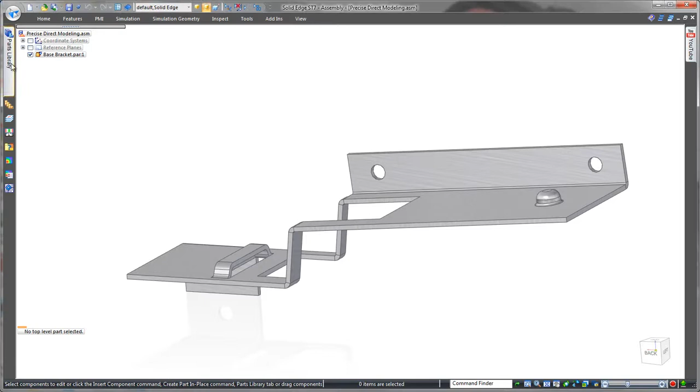Let's take a look at the precise parametric control on offer while we progress our spring clip concept. First, let's bring in our spring clip and assemble it with the parts it was intended for. Clip to the base,

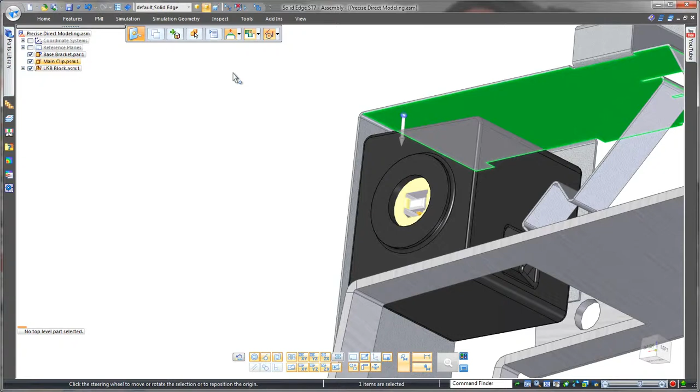and the USB block it needs to hold. The first precise change we need to make is to close up this gap between the top of the USB block and the spring clip. In most any other CAD system, you'd have to make this change at the 2D sketch level with sketch relations. In Solid Edge, we can simply relate faces in 3D instead.

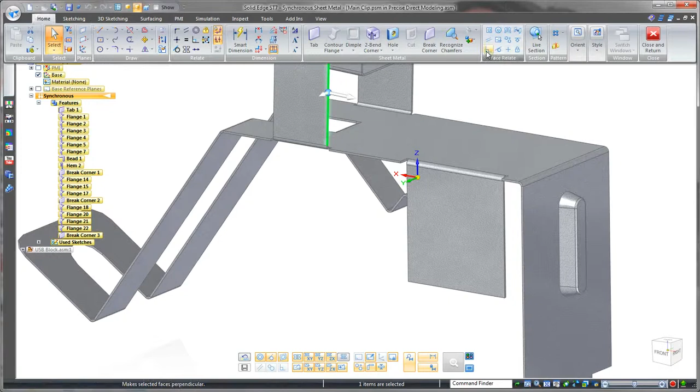Easy. Looking at the back, I noticed the tabs on the top are not quite square with the top face. No problem, a couple more 3D relations will fix this. For the side faces of the tabs, making them perpendicular to the top. And for the top faces, making them perpendicular to the side. Notice how both tabs are being updated here. That's the intelligence of synchronous technology.

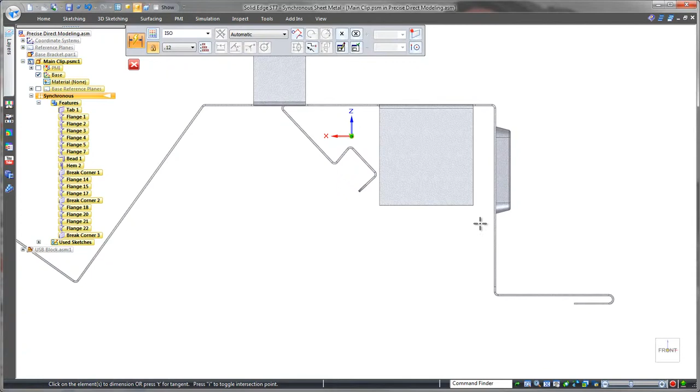Let's start detailing this model, and of course dimensions are key. Solid Edge has two main ways to dimension. The first is like most any other CAD system, in 2D when creating a sketch for a feature, but the second, which you see here, is unlike most any other CAD system, and much more intuitive. Just dimension the 3D model directly.

We can leave this floating so that we still have the flexibility for further changes, or lock it down to be precise. We'll lock this down and we'll add another one for the flange width.

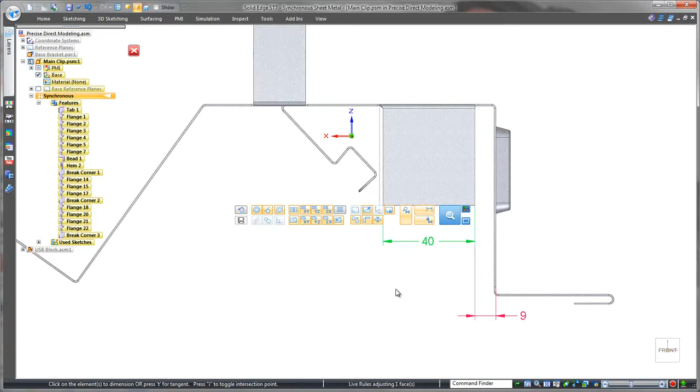We'll dimension these top tabs next, and look closely at the precise control that's provided. These green arrows allow us to control the direction of the change, which side moves and which side stays put, or even a symmetrical change if we wish.

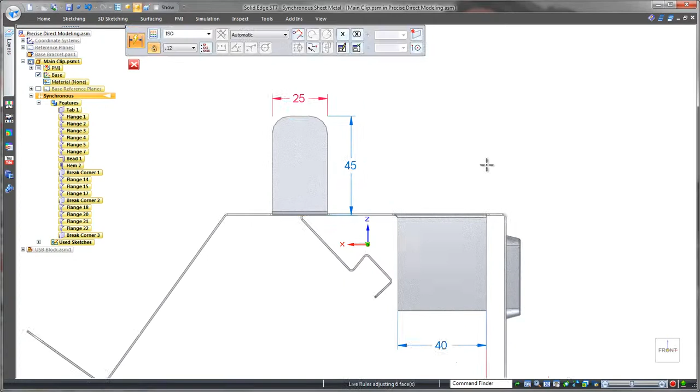We'll speed through adding the other required dimensions using the same technique, and for your information, the red dimensions are the ones we've locked down, and the blue ones are the ones we've left floating. Overall, notice how easy they are for someone else to understand. Great for reviews. Oh, and of course, we're not just talking linear dimensions, let's detail the angle here too.

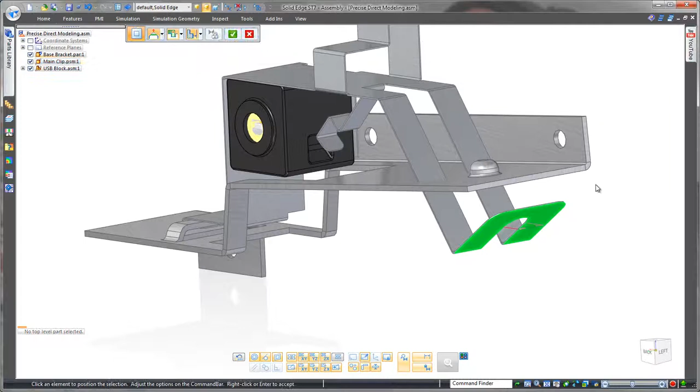We should finish working on the other end of the clip. Another 3D relation will do the trick to move and match the angle of this piece. And we can use what's called the steering wheel to drive a synchronous drag and snap into place here. And let's make sure that the whole thing is assembled centrally.

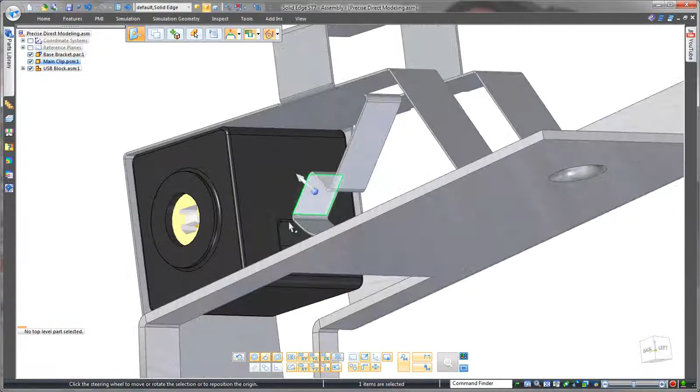Next up is the retaining clip that needs to slot inside the groove of the USB block. Once again, an easy face relation, or steering wheel drag and snap can be used. Whatever's easier.

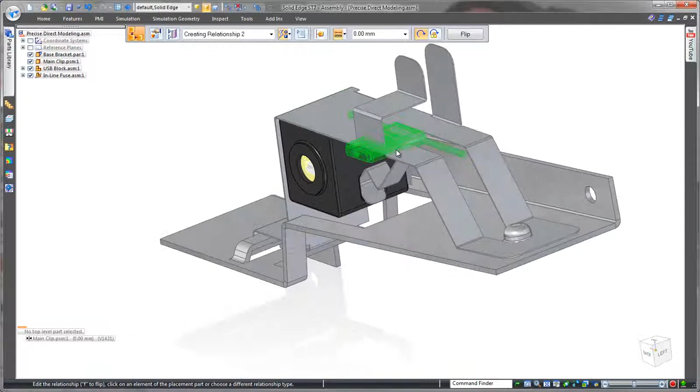Perfect. One last sub-assembly to bring in an inline fuse. The purpose of the top tabs are to support this, so we need to make sure it'll fit tightly into place. So let's make some more precise direct edits.

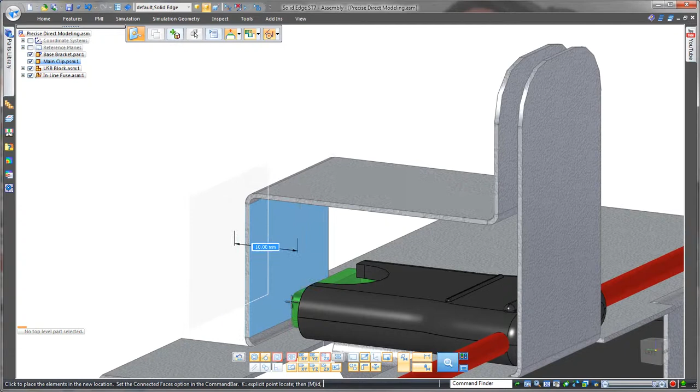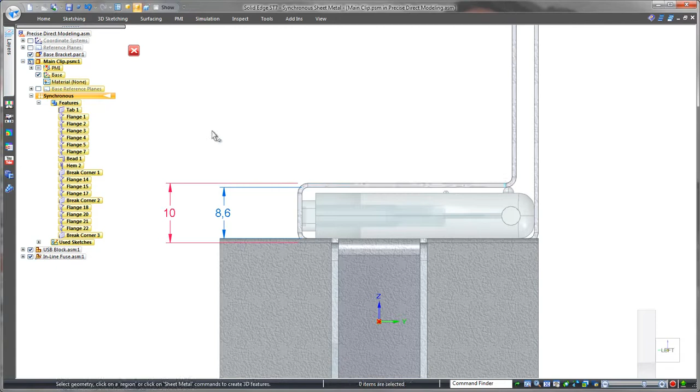Something worth noting is that for sheet metal dimensional control, we can design to either the outside or inside. It doesn't matter which dimension we change, be it inside or outside. Solid Edge will always take into consideration the material thickness.

Design complete, and of course it doesn't stop there. We can take this same all-in-one concept to final model into a manufacturing drawing. First of all, let's create a custom view of the assembly so that all aspects of the part can be seen. Let's have that shaded, and a few views of just the clip.

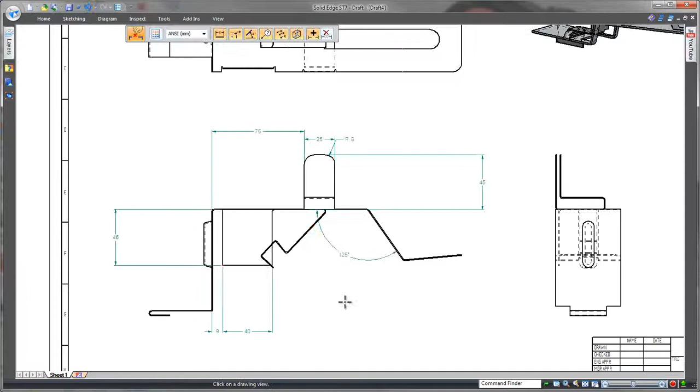And remember the 3D dimensions we added to the part? Look how quick we can bring those dimensions into this view.

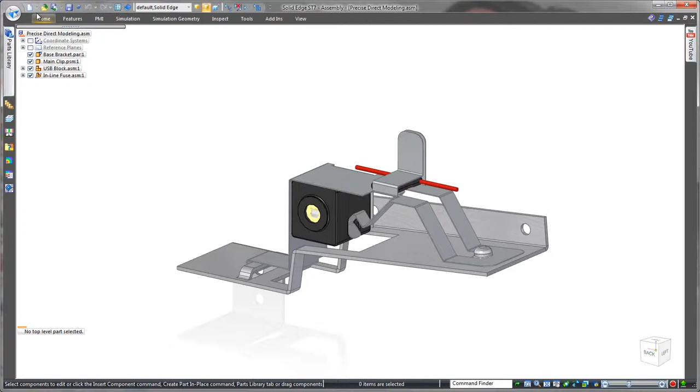So in summary, we've seen how Solid Edge with synchronous technology provides rapid direct modelling, but importantly with precise parametric control, relating faces, dimensioning, detailed drag and snaps, all in 3D, no sketch work in sight. Fast and easy, but most importantly accurate. Solid Edge, design better.